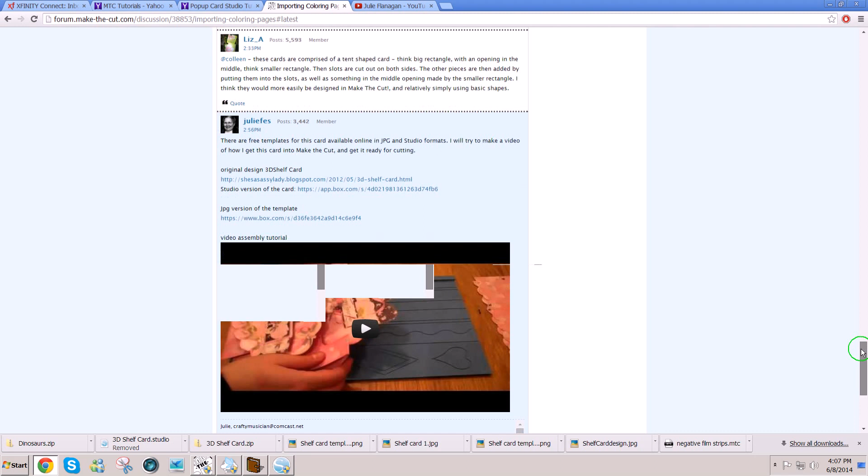And then I found a video assembly by someone else that you might like to see how the card is put together. If you search online on Pinterest for shelf card, you'll see all kinds of lovely projects made according to this design. So be sure to look to get some ideas on how to decorate the cards.

What I'm going to do is show you how to get this file from Silhouette Studio into Make the Cut and ready to cut in Make the Cut software, or if you prefer to export it as an SVG that's usable in other software. So we'll get started by opening up the Silhouette Studio.

I'll go to File and I'm going to open this studio file, and I'm using the Designer Edition version 2.0. You could use 1.9 if you wanted to. And I've already downloaded the shelf card. That was the JPEG folder. Here's the 3D shelf card.

So open it in Studio. There's a lot of pieces in it, but all I have to do is go to File, Save As, and change that Studio to SVG and click OK.

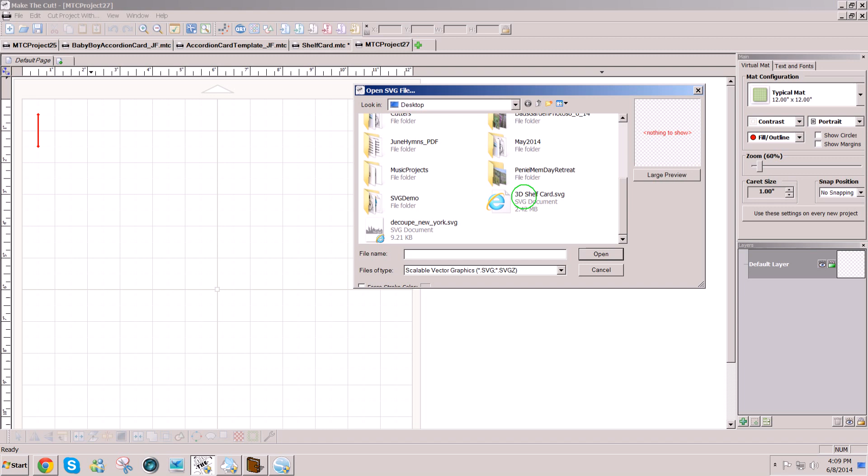Now I'm going to go into Make the Cut and we'll open a new project here, and I will go to the SVG icon at the top of the page to import the SVG and look for my 3D shelf SVG card and click on Open. And you'll see that all these pieces come in, including the instructions.

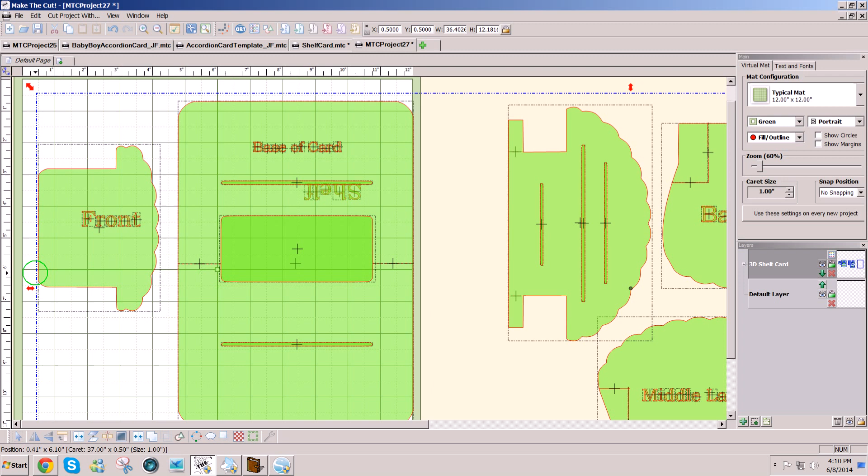Now I'm going to change my mat here to green so that you can see the various pieces on here. And nothing is grouped, so the first thing that I do when I get this project in here is click away from the selections to deselect. I'm going to take the text in each little area, click on the join at the bottom and send it to its own layer, because I'm not going to want to cut these words.

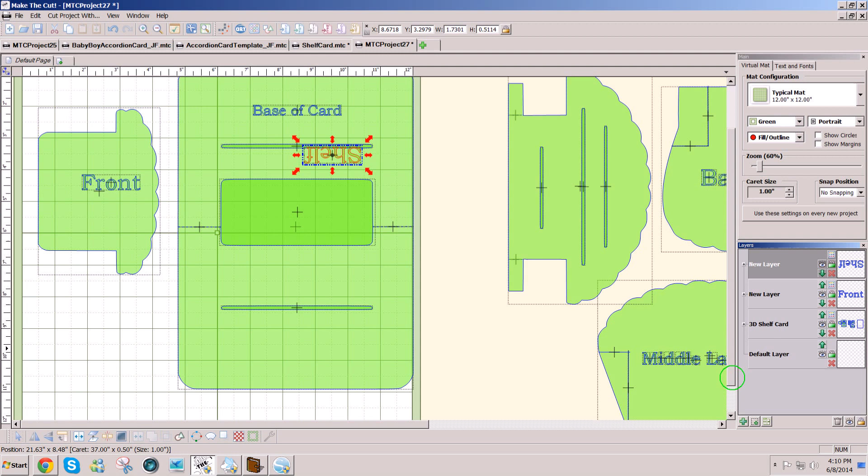So I join it together to make it easier to handle, and I just click on the smaller of the two green plus icons in the lower right hand corner so that I can put these words on other layers so that they can be hidden, so I don't want to cut them. So first I'm joining, and then sending to its own layer.

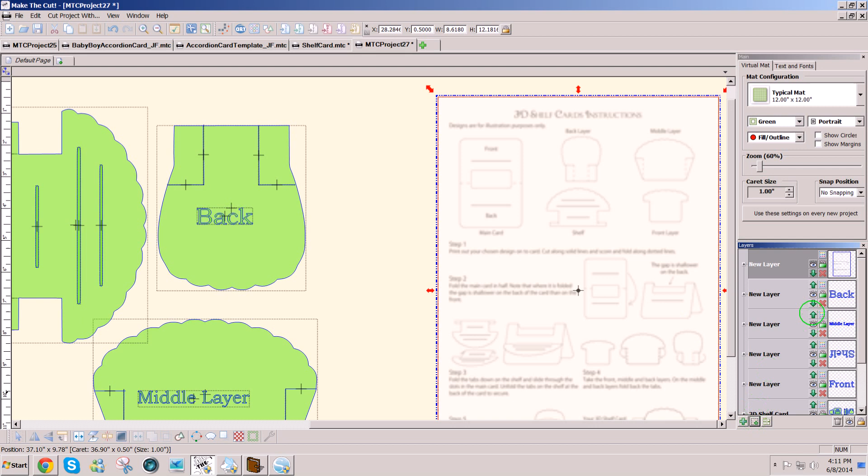I'd also like to send the instructions to its own layer, so I'm going to hide them for now. You don't need them right now. And now I have all of these different words here.

I'd like to put all the text on their own layer. So I'm going to click on this and hold Shift and click on each of the words on the right side of the screen here on the Layer Properties toolbar and click on the smaller, the green plus icons to send all of these to a single layer.

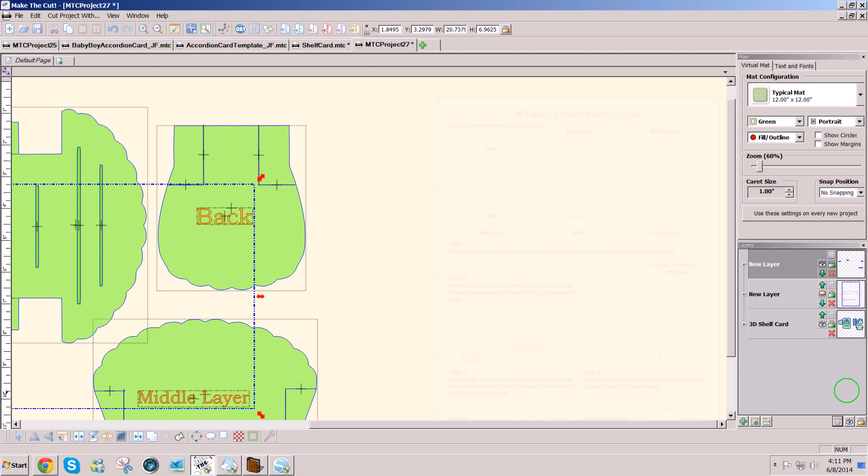Now I can click on the trash can to get rid of the empty layers, and I can hide all of the text that I've selected. The next thing, oh, I forgot one of the texts. I'll get that. Send it to its own layer.

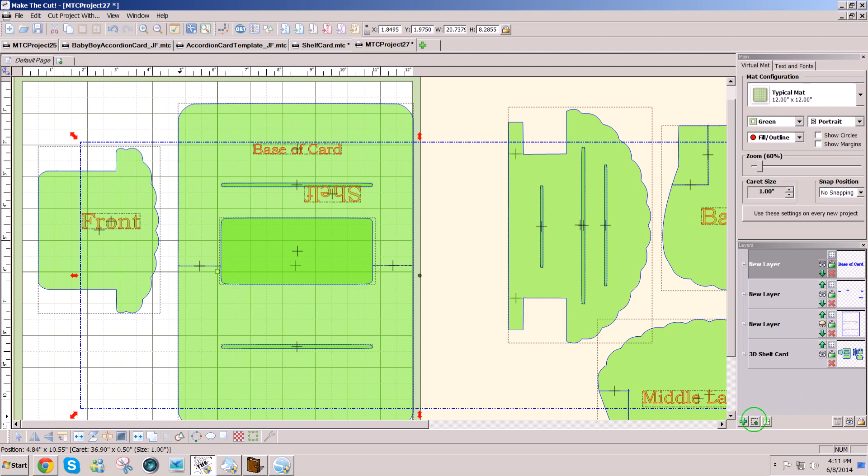Now I'm going to open the others and send them all to the same layer. Click on this layer, hold a shift, click on this layer, and click on the plus icon, so now they're all on the same layer, and I'll hide them.

So now I'm left with the design pieces. The next thing I like to do is put all the score lines on their own layer, because if you want to use a scoring tool, you're going to need to have the score lines on a separate layer. If you don't want to use a scoring tool and just want to use dashed lines, these might cut okay. Let's look at this in outline form.

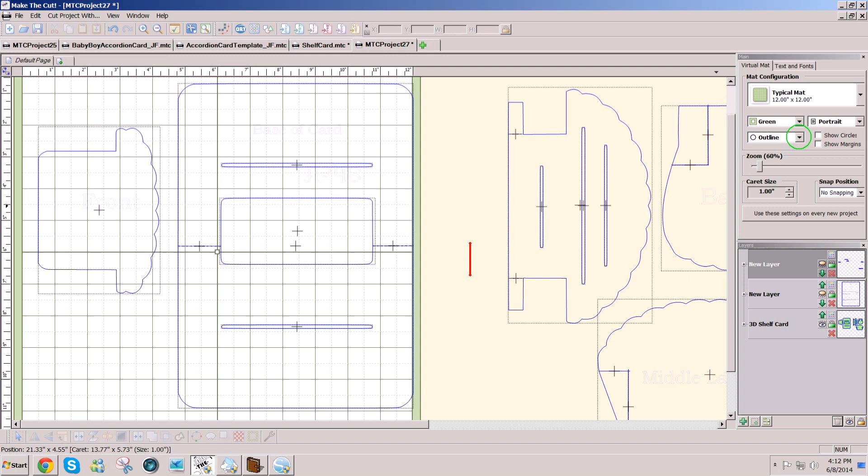Those score lines are very close, and I like to spread mine out a little bit more so that they don't tear. I generally don't use a scoring tool, I generally just cut them.

So I'm going to select these scoring lines, join them and send them to their own layer. Then I'm going to select these score lines, join them, send them to their own layer, and these score lines, join them, send them to their own layer, and these score lines, join them, and send them to their own layer.

Now I'm going to hide all of these score lines, and I'm going to leave them on separate layers for now because I want these score lines to stay with the actual designs. Did I get these? They don't look like I got these. Send them to their own layer and hide. There we go.

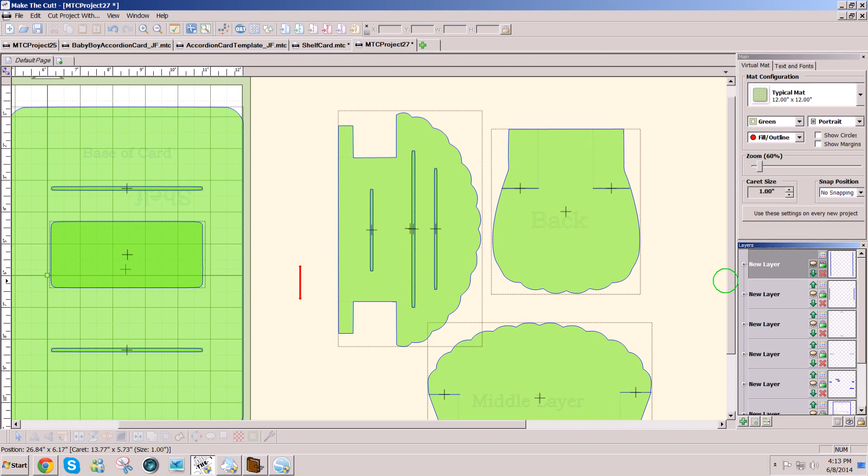Now all of the pieces that I have left, I would still like to join them together. Once you select all of these pieces and click on join, you see the way it's going to look when it's cut out with the slots. And then I'll select all of these and join.

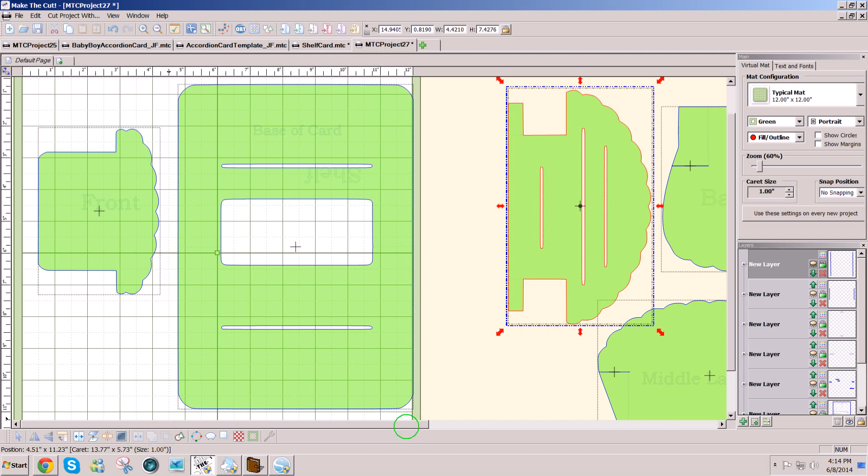And I'll select these to keep the cut lines with the piece, because I will be moving these around on my screen in order to cut, and I would like the lines to stay all together.

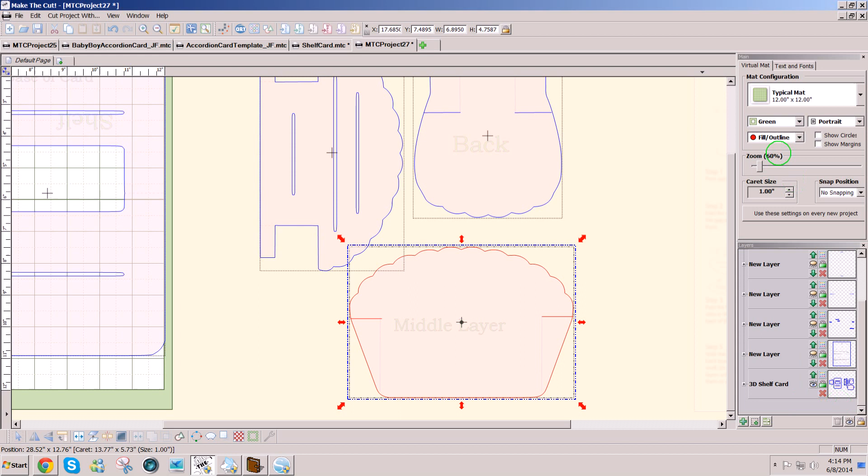So the other thing I might want to do is change the color of these. I'll change these to pink so that I can view this with contrast, see them a little more clearly. And when I cut these, since they don't all fit on one cutting mat, I'm going to right click on 3D shelf card and select each its own.

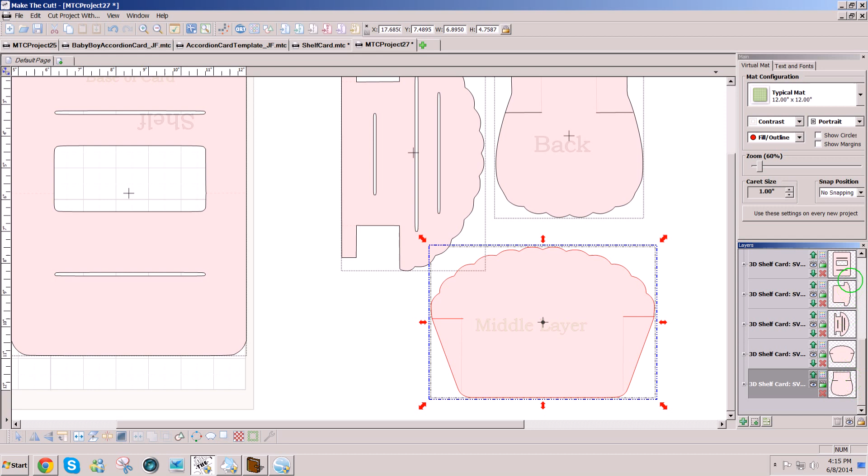This way each of the design pieces goes to its own layer, and I can choose the pieces that I want to cut. Or if you prefer, another thing I could do, which I think I will, is select the shapes that are going to go on one page, and I'm going to send them to one layer and click on the trash can to get rid of the empty layers.

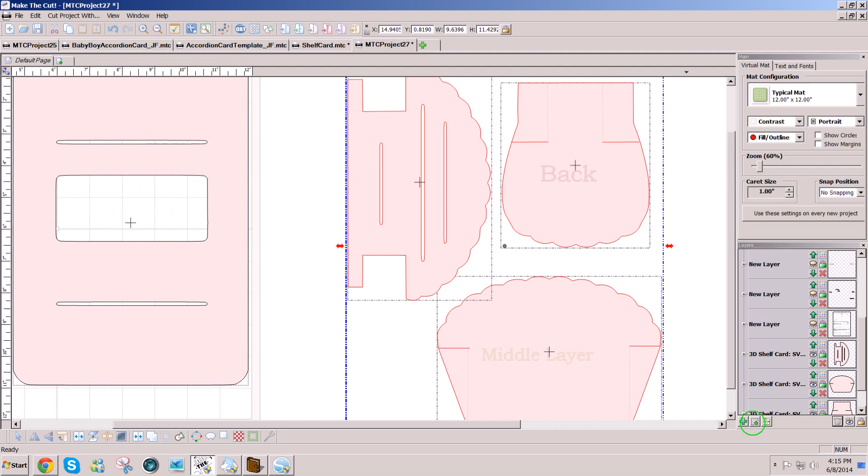Then those pieces that will fit on another page, I can select all those and send them to their own layer.

Now if you were going to cut these all out of different colors, that's where you would want to decide if you want them on separate layers or not. It's all up to you and how you decide it. And you can determine what you want in terms of designs for these.

A lot of the ones that you see online are being sold as print and cut with all kinds of artistic designs printed on these different pieces, and it would be up to you to decide how you want to decorate your card.

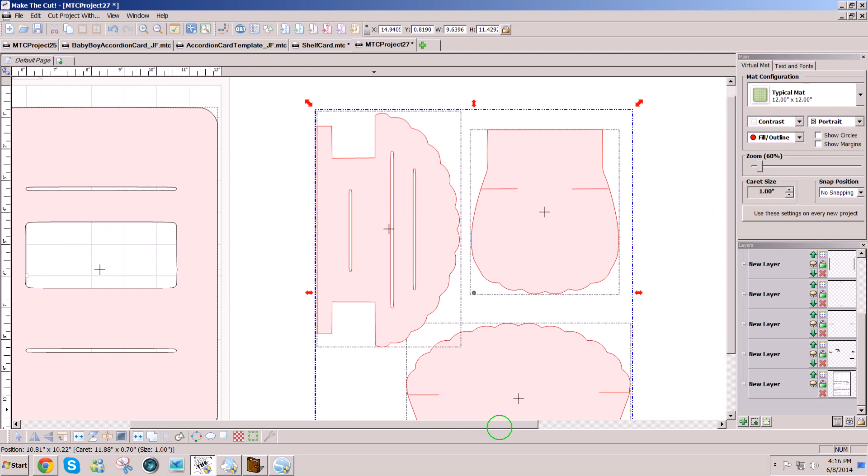But right now I have all the pieces all on one page. I'm going to show everything with the toggle, this eye in the lower right corner, show all, and I'll zoom out a little to show you that we have everything here.

Now if you wanted to, you could send each layer to its own page, but before I do that, I would like to save all of this as SVG.

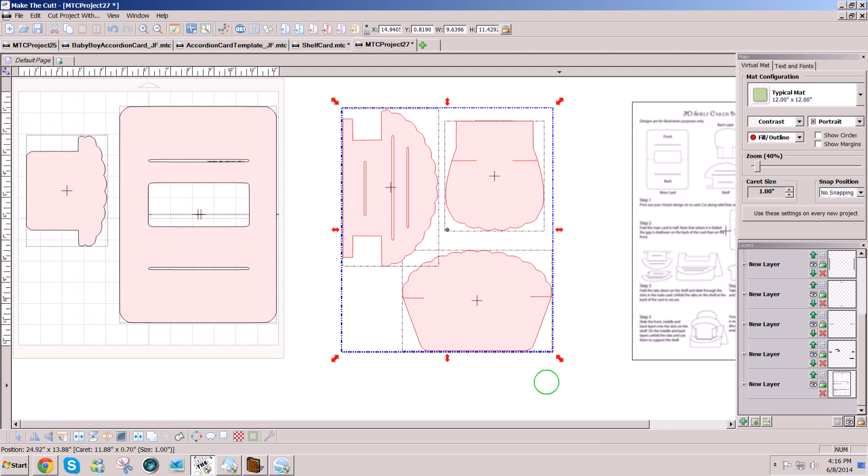I see a little score line there. I wonder what that is. I'll send that to its own layer. Oh, it's not a score line, it's a word. Okay.

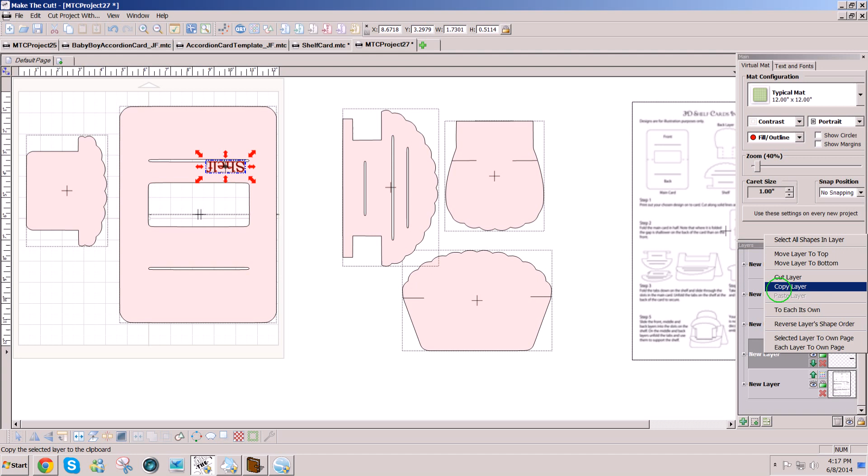So I'm fine on that. And I thought I was showing all the layers. Oh, all of the words are way down here on the bottom, so if you want to see the text, which I probably do when I export this, I'm going to move this layer to the top. Now I can see all of the text.

If I want to see these instructions really clearly, I found the quickest way to do that is to move it over here and go to File and Print Preview.

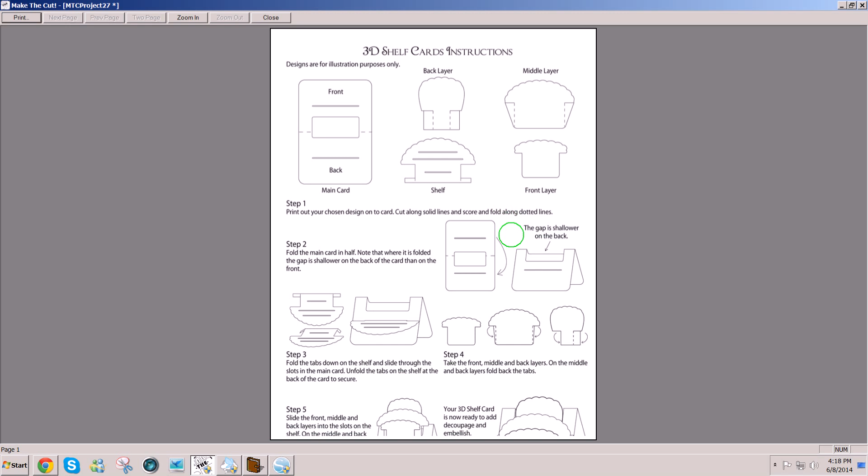But I'll have to move it to the top, so right click on the layer, move layer to top. Now I can go to File, Print Preview, and I can read these instructions anytime I need it, which would probably help me if I put this on a separate page so that I could just go to that page for instructions. But for right now, I want to leave it all here.

I want to select all using the lower left arrow icon and go to File, Export, Selection to SVG.

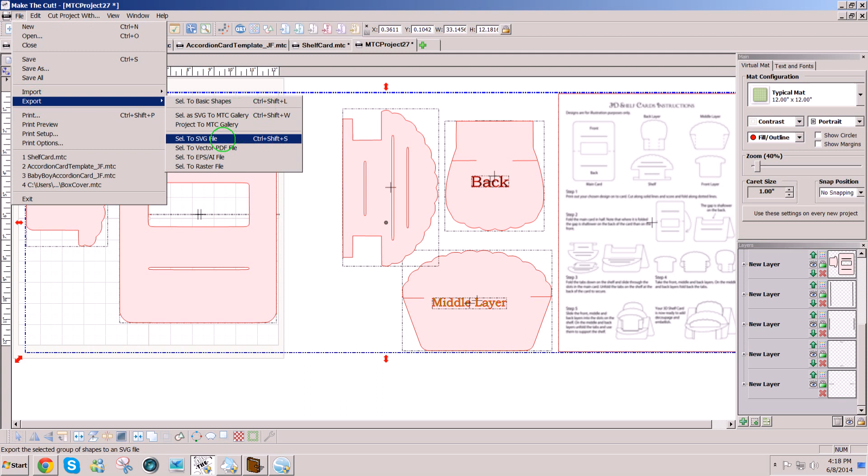I'm going to do one more thing here. All these score lines need to go to the top, I think, for them to be more visible. So I'm selecting them all, and I can join them. I think I will join them so that they're all one piece. And I'm going to move this layer to the top by right-clicking and selecting Move Layer to Top. Now I can see all those score lines.

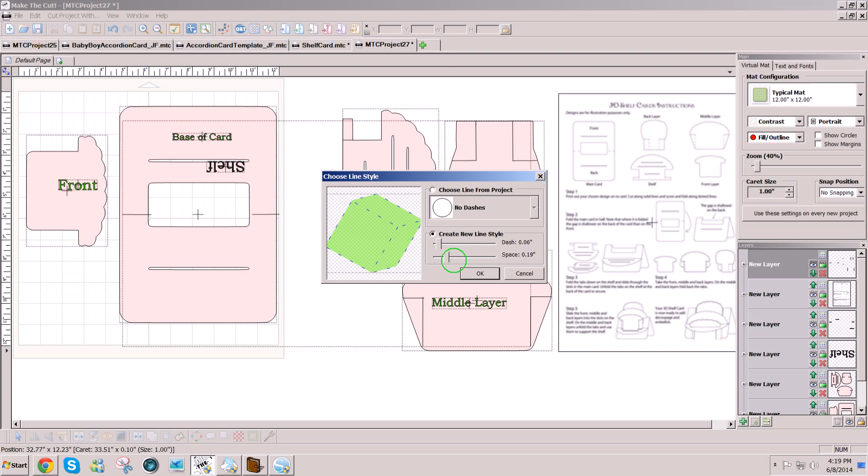I'll get rid of the empty ones. These are just things that I do when I'm preparing to cut or export. The other thing that I didn't do yet was change all these score lines. By clicking on the color box icon, I can click on Line Style, and I'm going to move these score lines, give them more space between them, and that's how I prefer to do my score lines.

And I'm going to put this text all on one layer. And one more thing I do is label the layers. This is Do Not Cut Text. Remind myself I'm not cutting this, and I remind myself that this is score lines. So what I'm doing is just clicking on the layer twice, double clicking the layer name, and typing in instructions, so that I know what each layer is.

I'm not going to give these layers names, but if you wanted to, you could name them middle, back, front, as you prefer. Now I think I'm ready to select all and export as SVG.

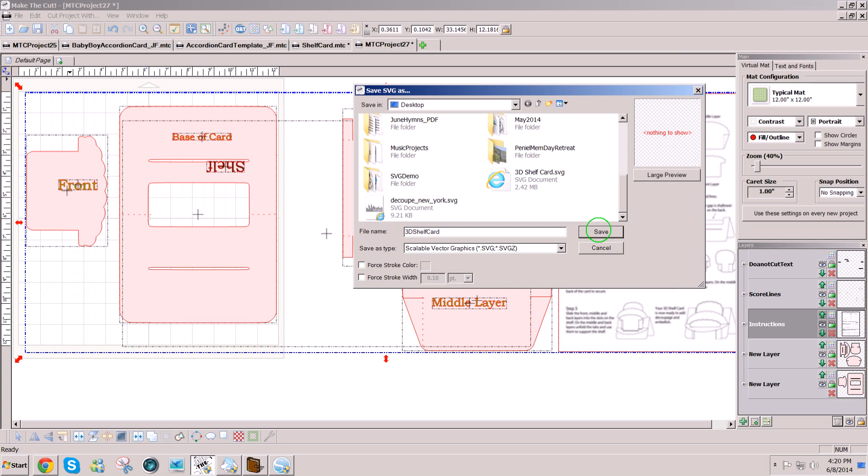So I go to File, Export, Selection to SVG file, and I'm going to name it 3D Shelf Card. A little different than the original SVG file, just so I know that it's my editing and it's ready for me to use in my other software. So I click on Save. So it's been exported now as SVG.

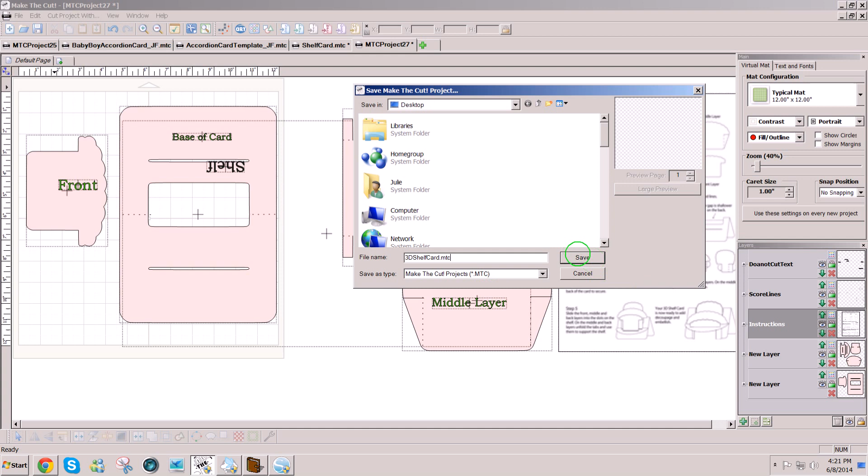I'm going to also save as 3D Shelf Card dot MTC. I'm going to save it in MTC format. So to make it easier for me to cut,

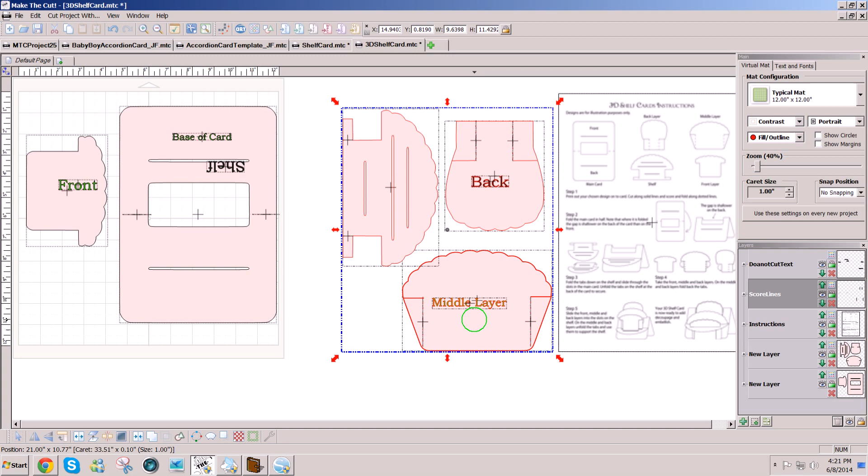I've joined all of these score lines together. I think it might be good to not have them all together. So I can use this split, and the reason I'm going to split them is I want to take this group of shapes to the next page. To do that, I'm going to go to Edit, Cut,

and I'm going to open a new page, and I'm going to go to Edit, Paste in Place, and just move it all over here. Now again, I'll click on the layers themselves to select them, send them to their own layer, which leaves the text and the score lines.

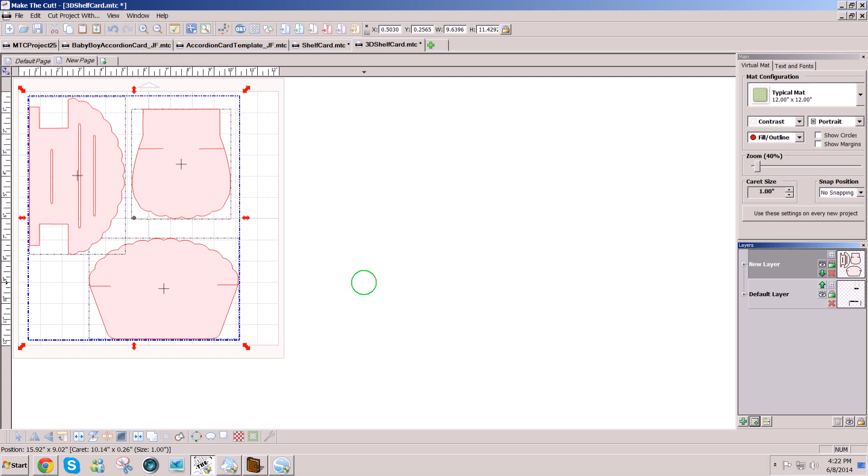So I'm going to hide this so we can see. So I'm going to take the text, put it on its own layer. Now I have the score lines, and I'll move them to the top. So I'll hide the words, and now this is ready to cut as a single page.

The other thing that I'll do is I'll take these instructions and cut, or Control X cuts, and click on a new page here. I'll type in instructions, add, and Control Shift V paste it back here. So now when I need instructions, I just go to File, Print Preview, and there they are without any shapes getting in the way. I'll also want to move my instructions forward.

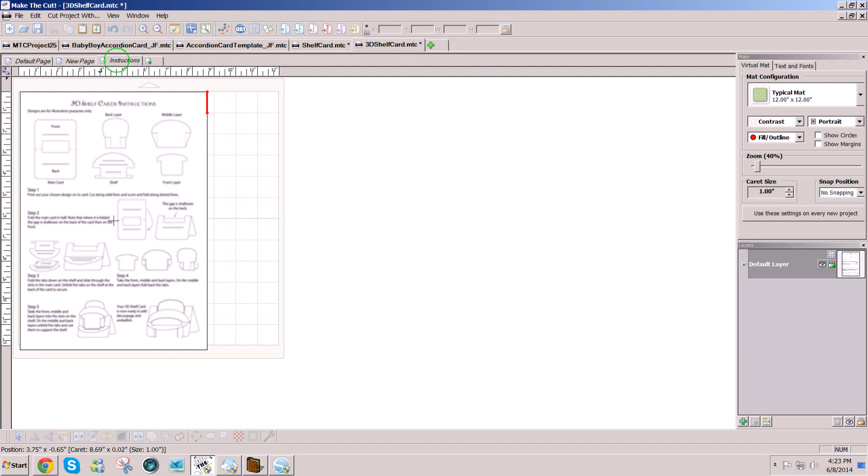That moves the tab to the right. So now I have this page here, and I want to make sure that I join my score lines again and hide my text, and now I have my designs on several pages, and I can decide on colors when I've got the theme of my card ready to go. So I'll go File and Save.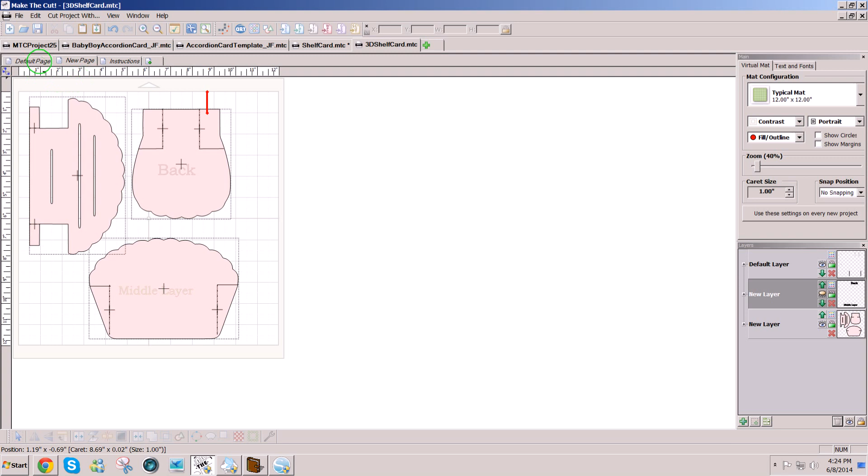I like to keep it all on one page until I export as SVG, because I can import that SVG into other software all as a unit. But now for me to use it on my Zing or my Pazzles or Gazelle or Cameo, I can do that all from this software.

And so I organize it the way I like it. You can organize it the way you like. So that's really all there is to it if you're doing the SVG file from Studio. It's Silhouette Studio Designer Edition versions 2.0 or 1.9.

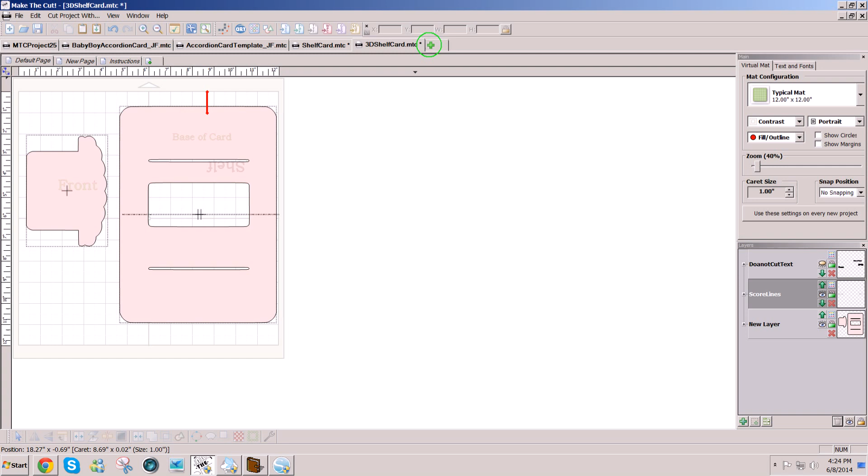So if you don't have Silhouette Studio and you need to get the files in, there's another way to get it in. You click on a new page here. If you downloaded the JPEG version, you would click on the pixel trace icon to get it in. And you see that there's 4 pages, one of them being the instruction page. So what you do is double click on the file you want, and you can bring it in.

It will probably be fine, but just to make sure, I'm going to take the threshold up to about 160 and apply the changes, just to make sure all the lines are connected.

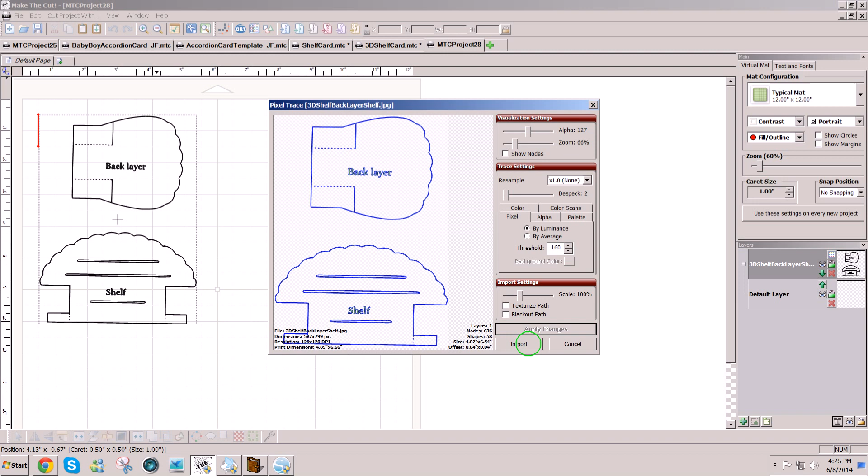When we bring in line art to Make The Cut, you get double lines. So in order to get rid of the double lines, we will be working with this. And another problem here is that these shapes don't come in the right size from the JPEG files, so we will have to do some resizing.

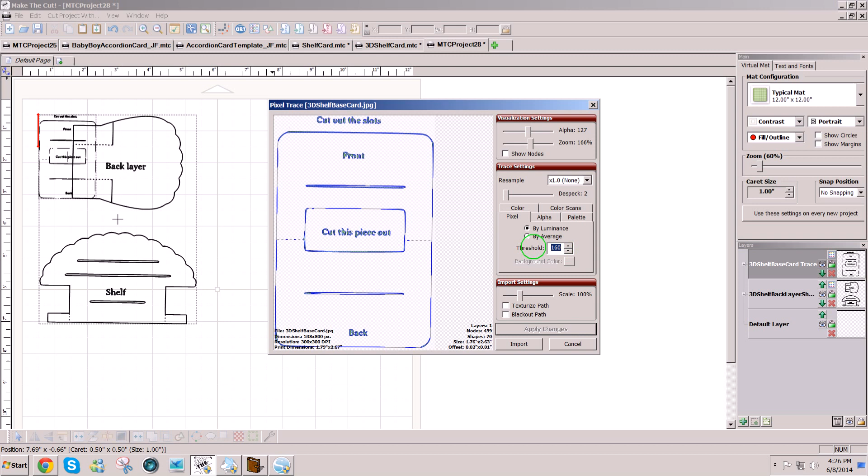So let's bring them all in first. I'll go again to Pixel Trace, and here's the second page. And again, I'm going to take this up to about 160, apply changes. Now it's going to have to be higher on this one because those lines are not coming in solid.

This method of getting the files in is not near as clean and precise in terms of size and straight lines, but it works if you don't have the designer edition.

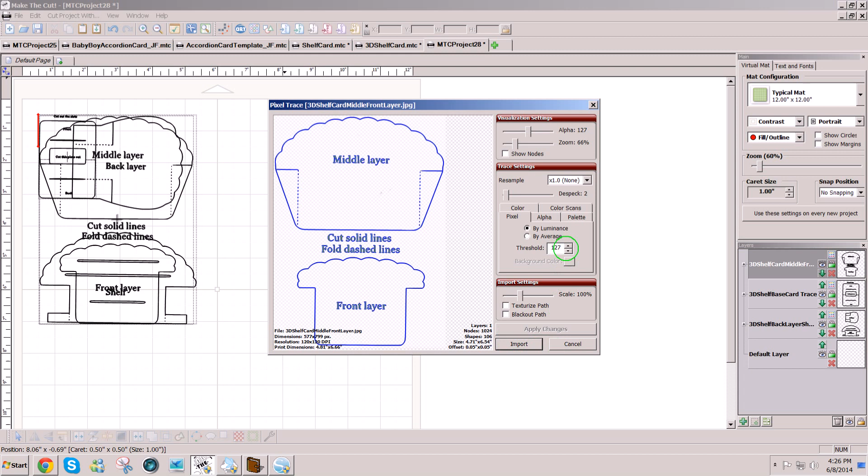I'm going to click on the third file, and I'll take this up a little bit to 160, apply changes, and import.

So I have several different files. You see how small this one came in as opposed to these, and they're not proportional, so I'm going to need to readjust according to specific measurements.

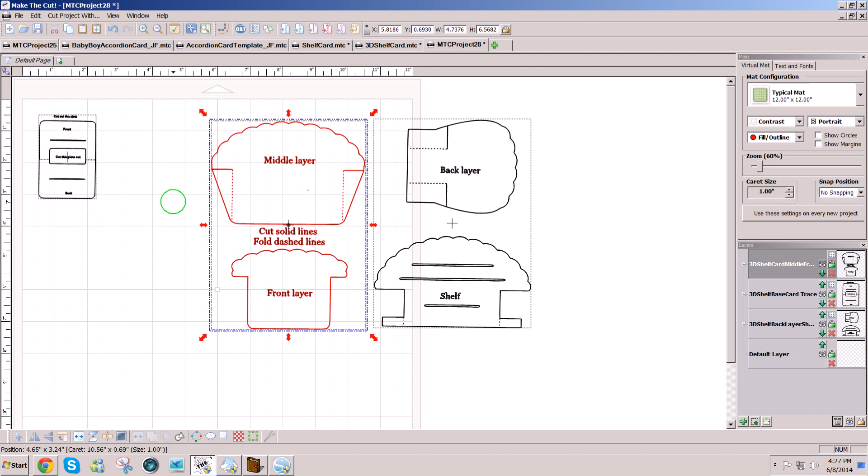But before I adjust the size, I need to do some changes on the file, getting rid of the double lines and getting the text out of the way.

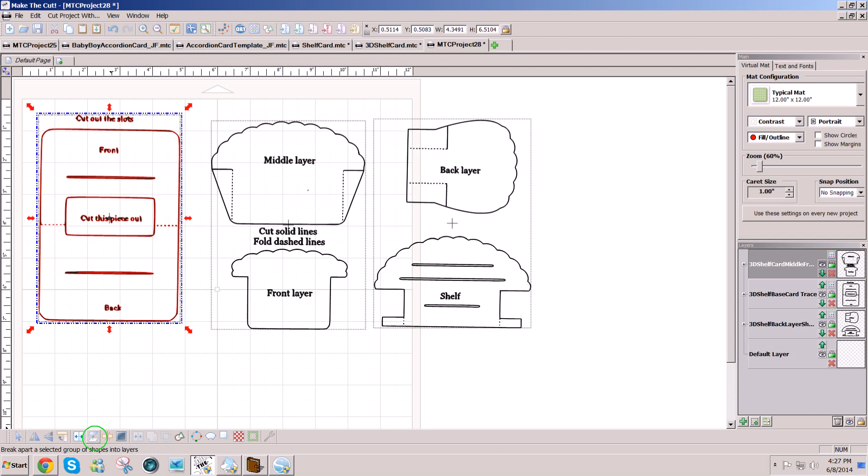So first thing I'm going to do is select the shape and then click on layer, and then I'm going to click on the center of the piece and move it to the top, and I'll go to the green screen so we can see what we're doing.

I removed the outside extra double line, but you see in here there's double lines and the text that we don't need. So to get rid of that, I'm going to click on this to select it and then select break.

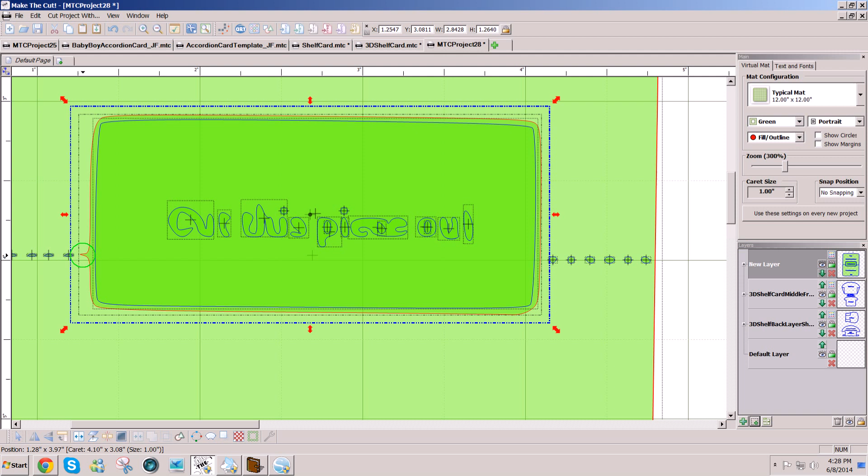And I'm going to click on the center. Maybe I'm going to get rid of the outside layer because it's a little more distorted than the inside. I like to keep the lines that are the best if I have a choice between one line or the other. So I get rid of that, and then I'm going to just delete the text.

It's not very legible anyway. And then these score lines, you'll notice, are round instead of being lines, and I really would rather have lines there.

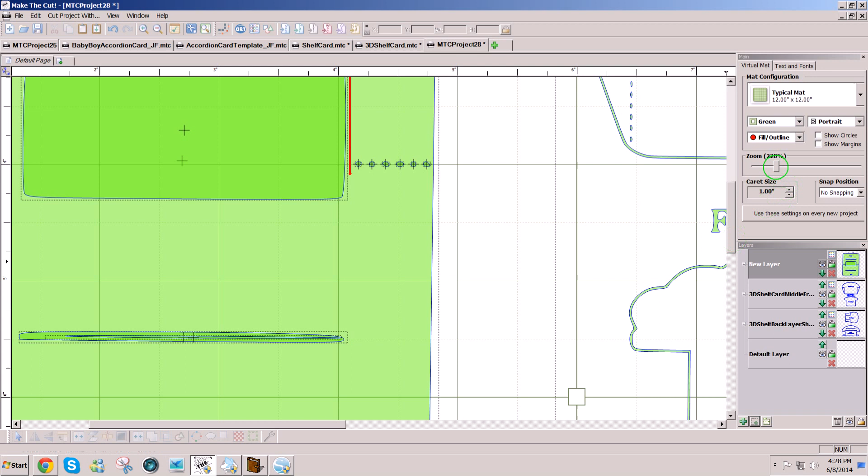First I'm going to get rid of the center piece of this double line and get rid of this text, just hitting the delete key after I select it.

Now I'm going to select these score lines, and I'm going to go to the wrench tool at the bottom and click on thin paths, and this created... I'm going to undo that again so I can make sure that I select all of it.

When you use thin paths, it creates lines in place of those circles most of the time. It didn't do that here. Not sure why.

Another thing I can do, if I like these lines, I'll join them. Make sure they look the way I want, and I'm going to join these.

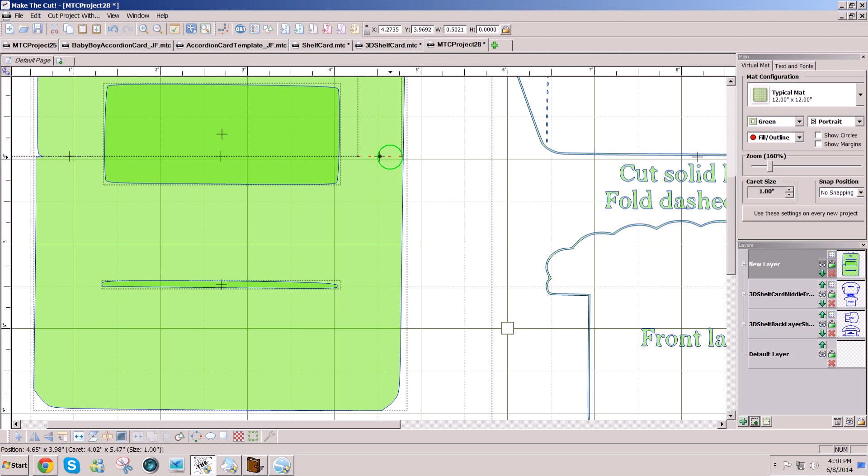And see, these are holes and they're kind of ugly. So what I'm going to do is delete those, and I'm going to select these, hold Control and Shift, and drag off a copy and move them over to the right, making sure that these lines are lining right up with the original. You can see the X, the plus on the left side, and my dotted lines showing the location, and I'm going to release everything here. So now I have some better lines here.

This one also has a center double line. I'm just going to select it and delete it, and select these and delete them. Now the trace on this shape is not ideal.

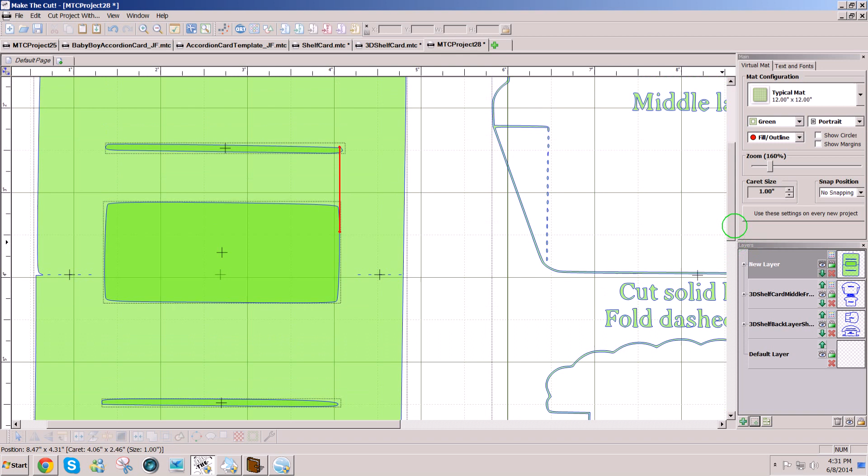That'll work. You can, if you wanted, just replace that. I'd probably even replace these with better perfect shapes, but to do that I'll create a new layer.

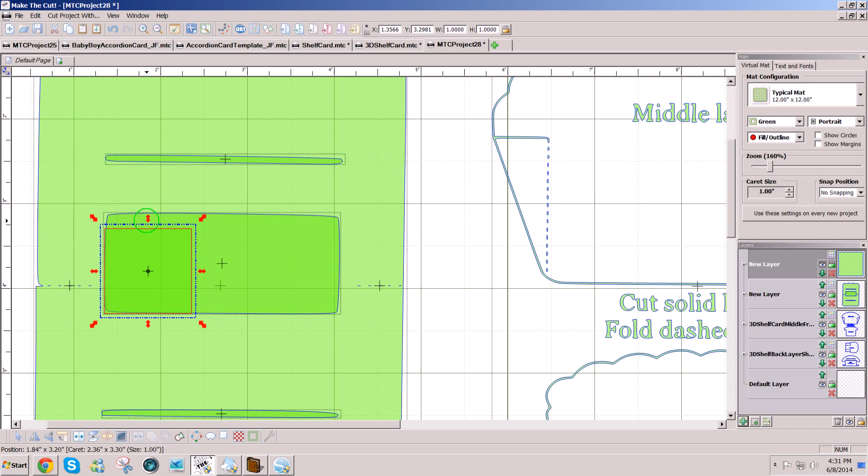It's highlighted in gray, and go up here to the shapes, basic shapes, and double click on the square and just resize it to the size that I would like this window to be, to get a nice clean square. If you'd rather use a rounded rectangle, you could.

And then I'm going to hold Control Shift and drag it up to here and just resize it here, and then Control Shift and drag a copy down here.

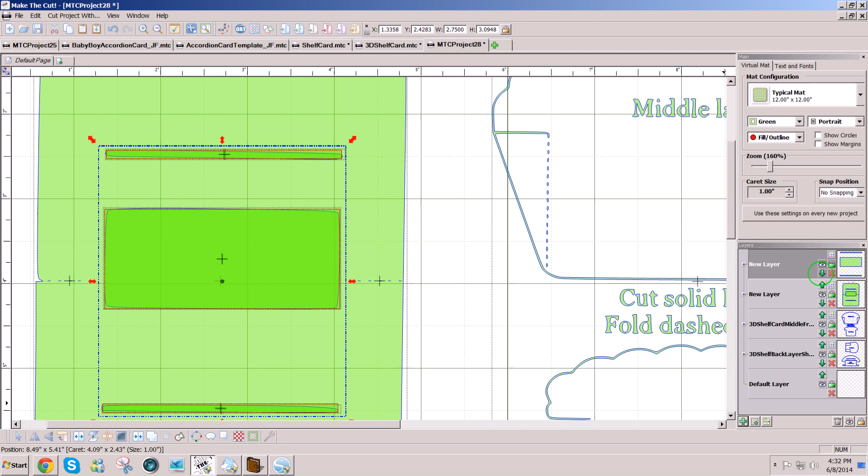And I'm going to go ahead and select these new ones. They're already selected. I'm just going to hide those and delete the ones that are here. Now I can show these, and I have some better lines there.

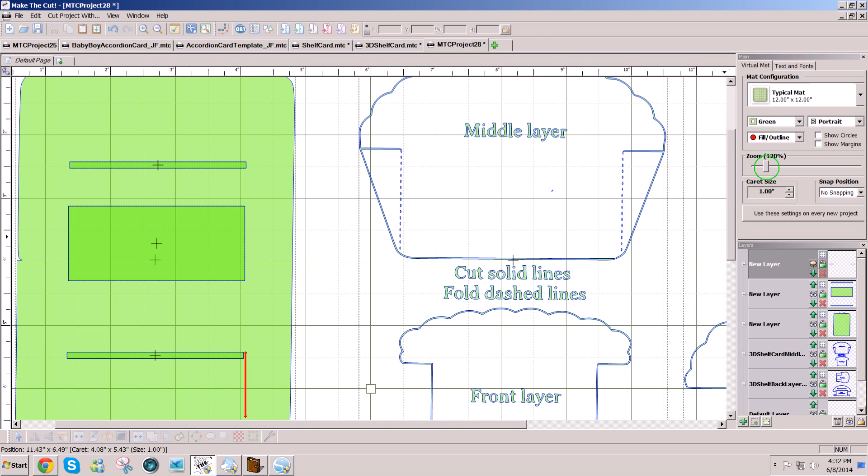I'm going to take these score lines and send them to the top and hide them, because now I want to grab this whole piece right here and use join.

If I were going to use this file, I'd probably clean up that corner. In fact, I might just replace this whole thing because it's crooked and kind of ugly.

So to do that, I'll just use break, and I will hold Control and Shift and drag me a copy of this rectangle and just resize it so that it's up here.

If I do have a rounded rectangle available in my basic shapes, I'll send that to the top, hide it, delete this one, and then have this one available. So if I don't want these square corners, I could get the rounded rectangle. For time's sake, I'll just use what I have here.

So now I have this piece and the score lines ready to go. The only thing that I haven't done to this piece that I would need to do is resize it.

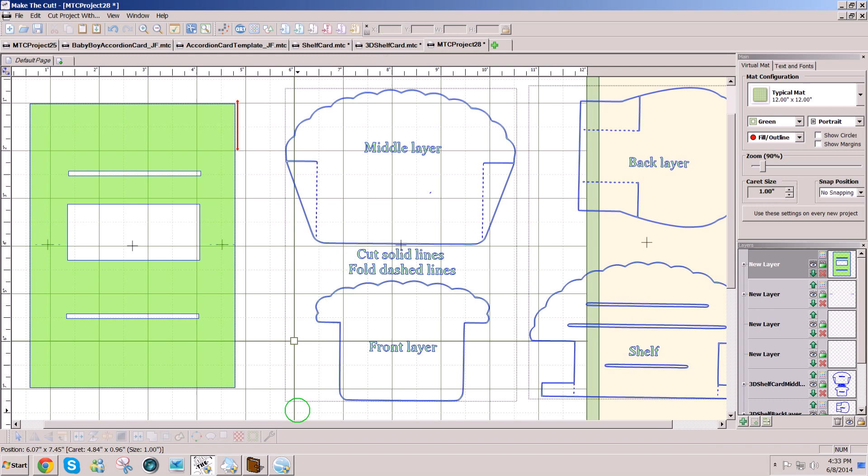So I'm going to go back to, you can either go back to Silhouette Studio and see what the size is there. You can select it, and they have two pieces there. You can right click and ungroup and then select that piece.

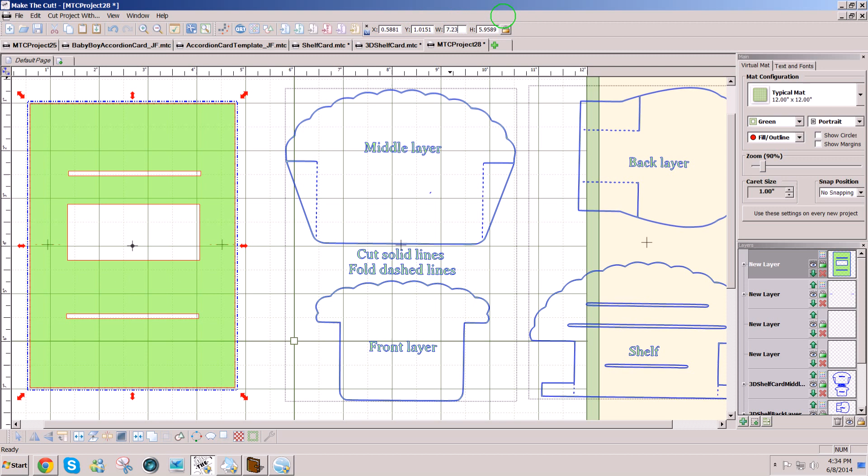And you see that it's 7.230 inches. So if I select this, I want it to be 7.230. On the width, 7.23, and enter with the gold lock icon on to resize.

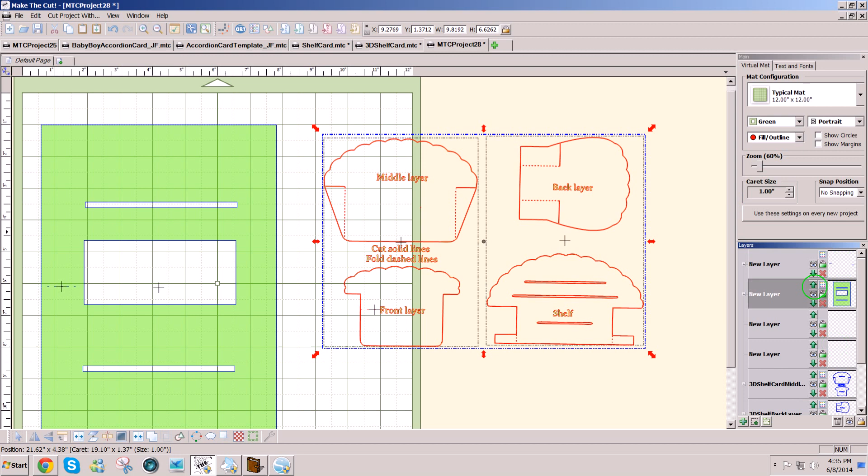And that resized the score lines as well. So I'm going to zoom back out, and before I start working on these pieces, I'll move them over. So move the score lines up and get rid of the empty layers, and now I'm ready to do pretty much the same thing on these.

Each one of these shapes has double lines on it. They're all selected, and I think I'll layer them all at once. Click on Layer, Control plus L, and then click on the top to send the top pieces to the top layer.

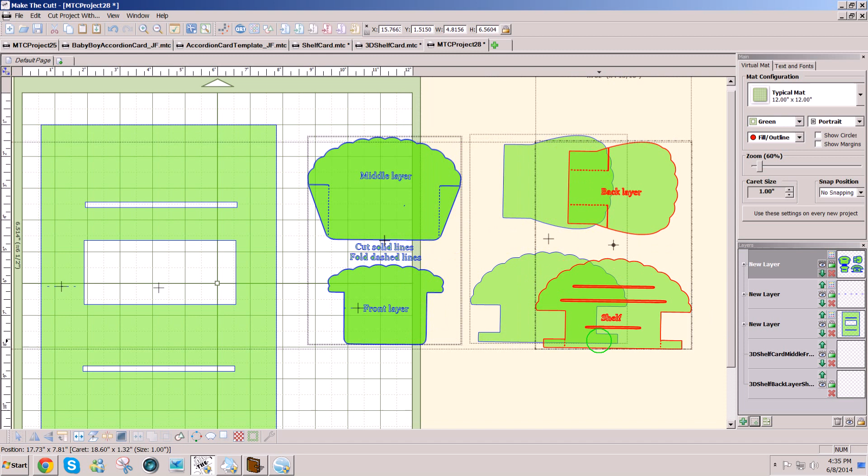I'm going to get rid of these bottom pieces here. And I have a score line there. Oh, that's a score line. That belongs here.

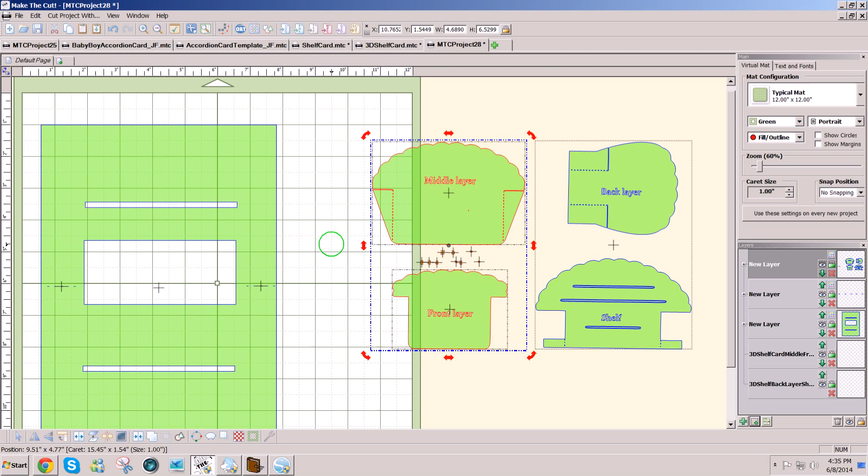Now to get rid of these extra little spaces here, I'm just going to split and delete these. Now I've gotten rid of the double lines on the outside, so this one's fine, and this one is fine on the outside.

But we have some inside double lines and we have text that needs to be removed. So in order to get rid of anything in the middle, I need to use a break.

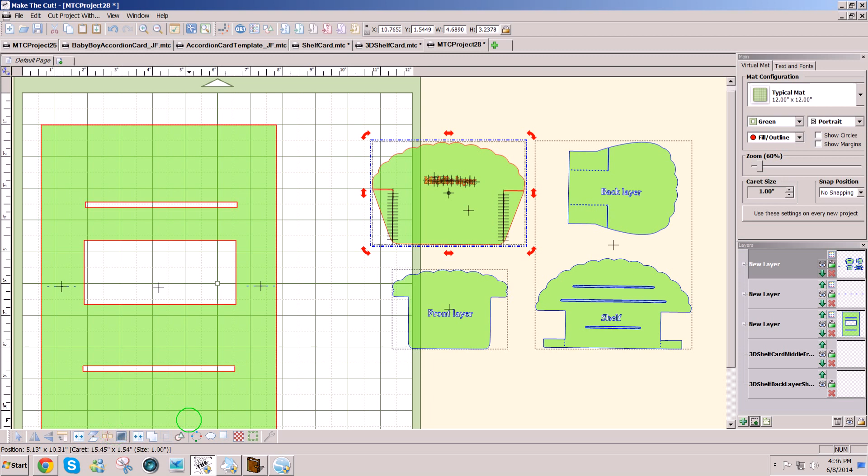So to do that, I click break, select the text and delete it, and click on break, select the text and delete it, click on break, select the text and delete it.

Now I have a center line in here. I'm going to delete that. Delete that one. I could zoom in real close to see those. And I want to check these.

Score lines are probably going to need to be made into thin paths. If we group them, we can see them better. So I'll join them, click with the join.

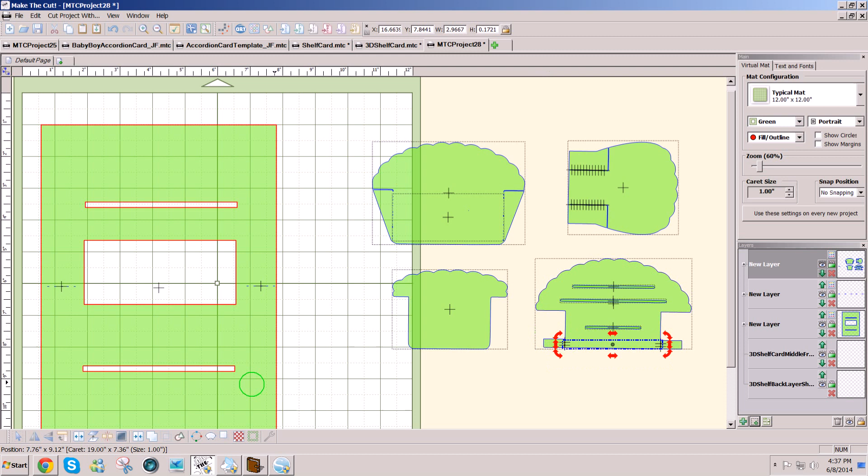And we have a couple score lines here. We'll join those, and again, thin paths. Select these. I'll join them, and thin paths.

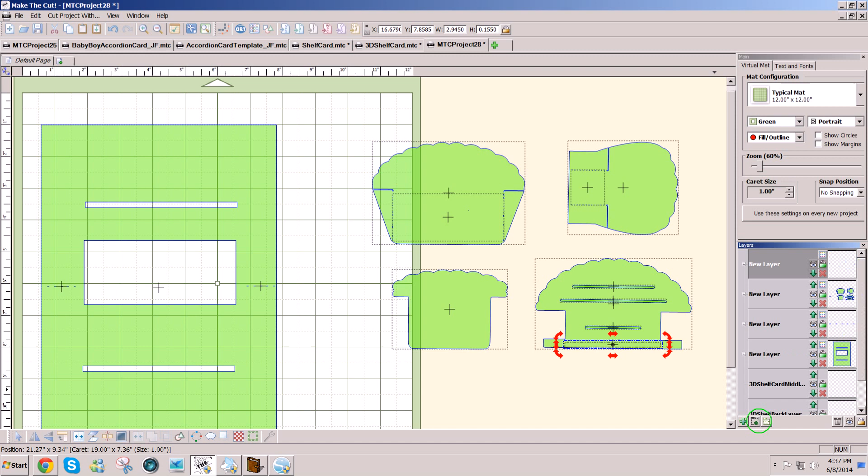So now, probably I'll send these score lines to their own layers so that they're out of the way, and hide them.

Now this one is ready to join, and that one's not needing anything. Let's look at this one.

I'll type 4 and 3 to zoom in really close. Well, there's no double line, just a little slit there. It picked up part of one of the dashes. I can get rid of that little thing by clicking on the figure 8 up here, clicking on the eraser tool, and holding the control key. I can do an inverse erase.

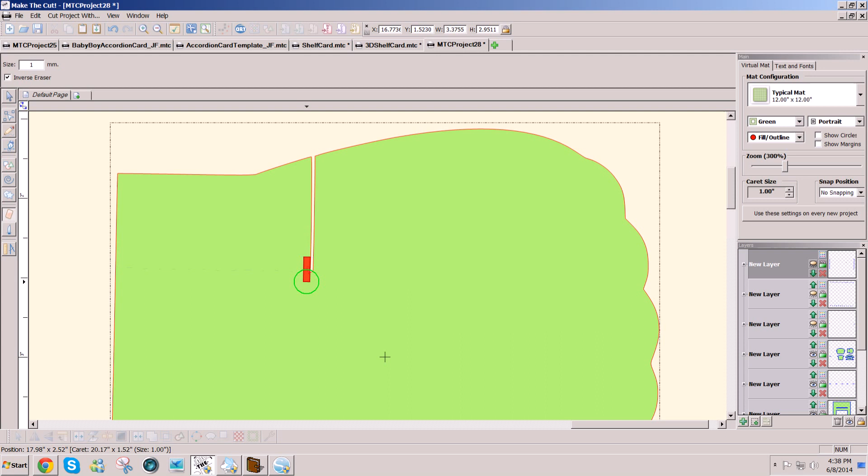So I'm going to Control Z, undo that. Well, I can do it again. I'll hold down Control and just drag over it. And that gets rid of the extra little jaggy there. And I don't see any double lines, so I think we're fine on that one.

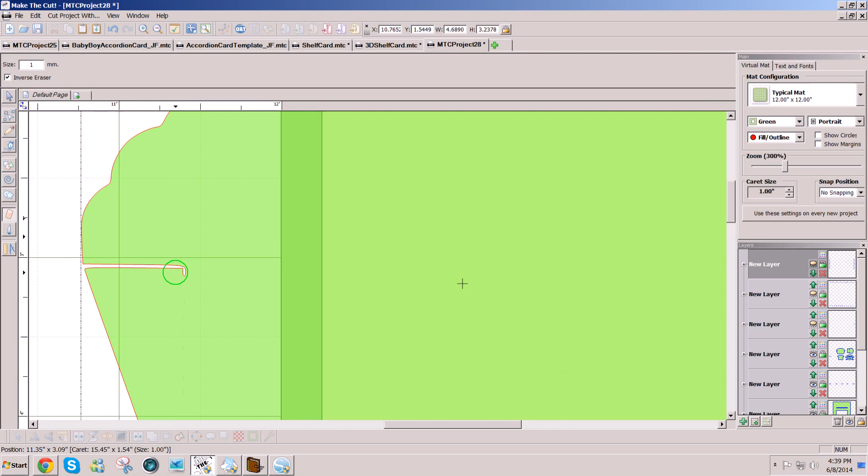So I'll zoom back where we were, and this one has probably the same issue. Type 4 and 3, get in there real close, and sure enough, click the eraser, hold the Control, and drag. As you can see, cleaning up these designs takes some major time, so you can see why it's worth it to me to have the designer edition and save as SVG with the 2.0 or 1.9.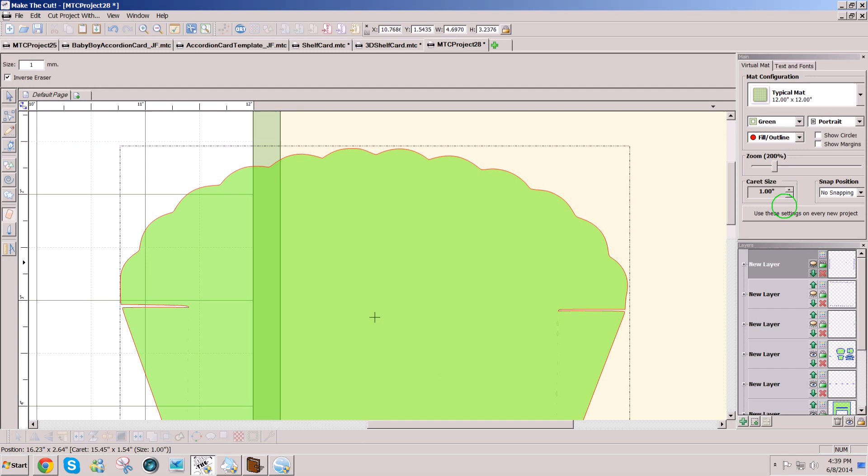Much easier. But if you only have a few designs to do and you don't mind taking the time, you can get this all done. Okay, so I think we're ready to show all. Now all we have to do is check the sizing.

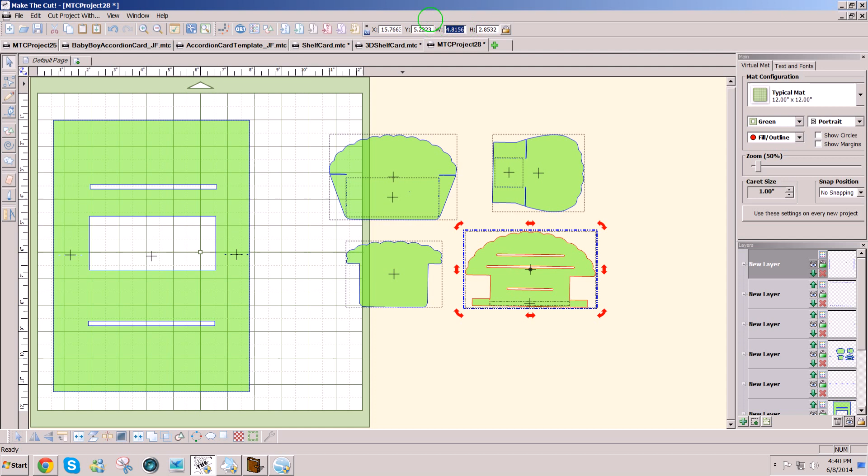Now these pieces all have, here's the shelf. This I didn't break yet, so I'm going to ungroup it, right click and ungroup, and select just this size and see, it's 7.365 tall, 7.365, and this would be on the width. 7.365, enter. So that one's the right size.

And the back, 4.515 across, 4.515, enter. I'll just move that up.

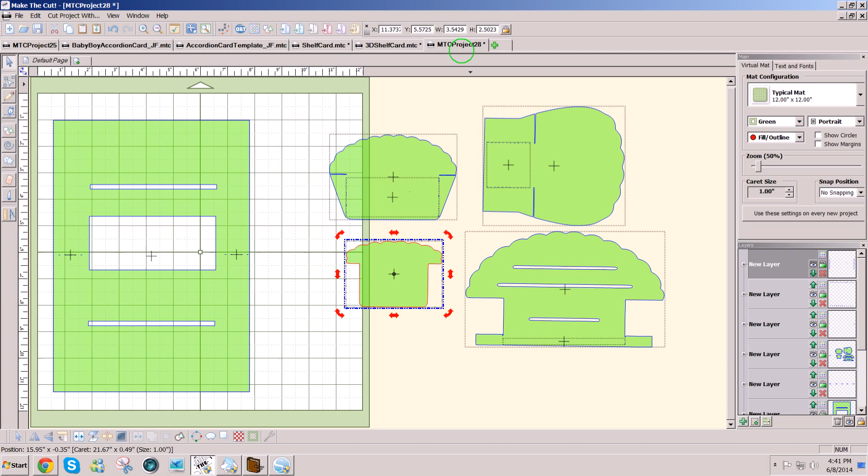And then this one that looks like a cupcake, this one here, is 3.7. Was that 3.7 bottom to top?

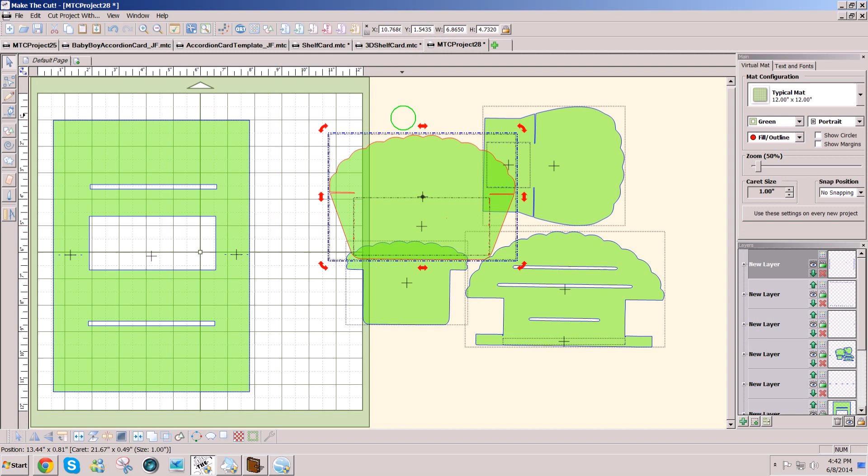And then the one that looks like a cupcake, and that's 6.865. Width, I think. Let me check it. Yeah, width. Okay, so I've essentially got the same thing.

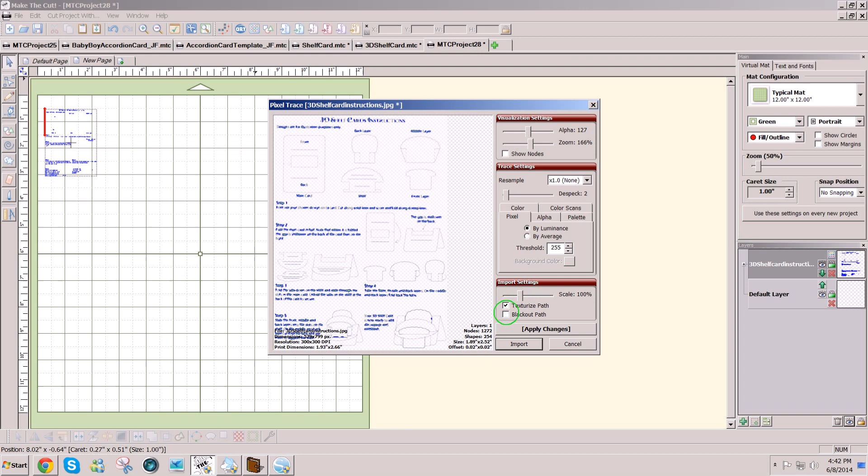I can also import the instructions if I want. I can click on the new page, add, then go over here to pixel trace, click on the instructions, and this time I want to view the whole thing at full resolution. I'm going to go 255 on the threshold, texturize, blackout path, apply changes, and import finish tracing. Then I can just resize it real big. Might want to use the contrast mat to see it better, or even better yet, go to File, Print Preview to view the instructions when I need it, and close.

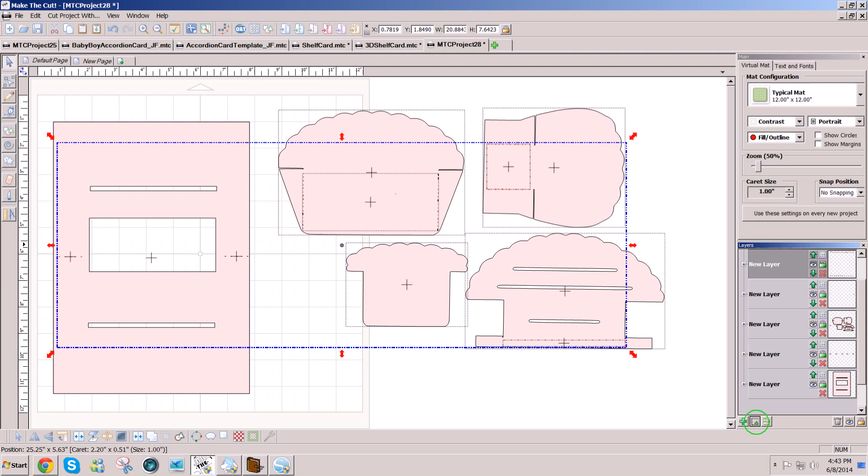So again, I can save these. Maybe I'm going to make these pink. Get rid of my extra layers. And I can save this whole thing. I'm going to want to hold the Shift key and put all of my score lines on a single layer. I like to have them at the top, then I can see them. Move layer to top.

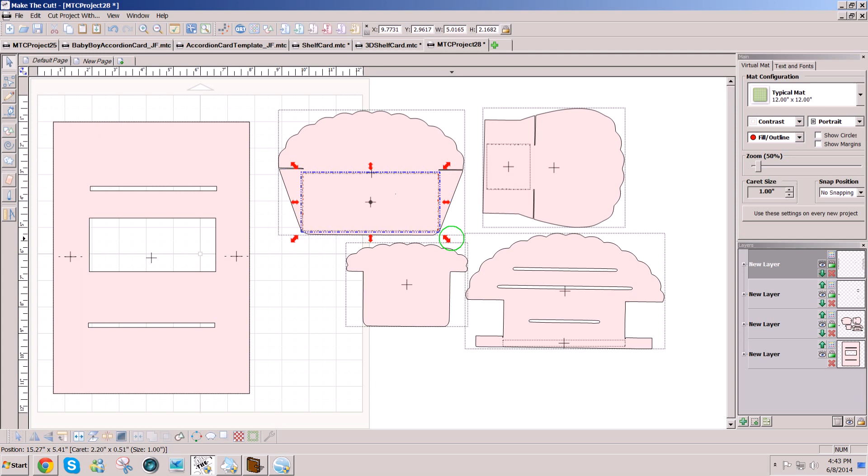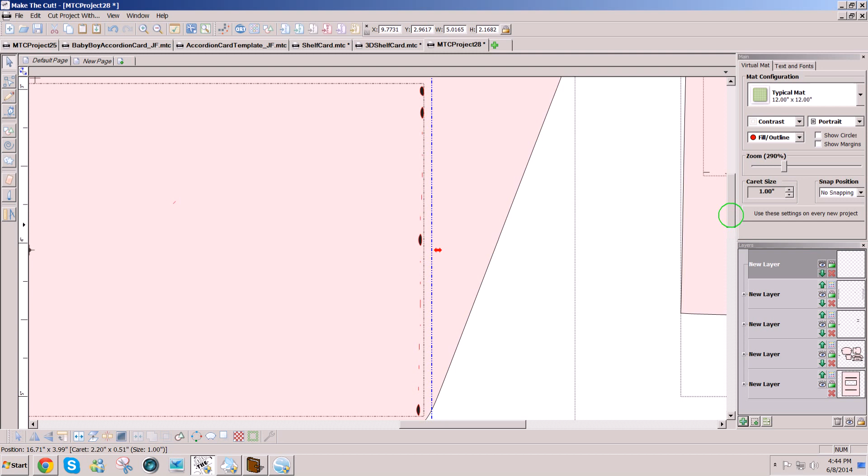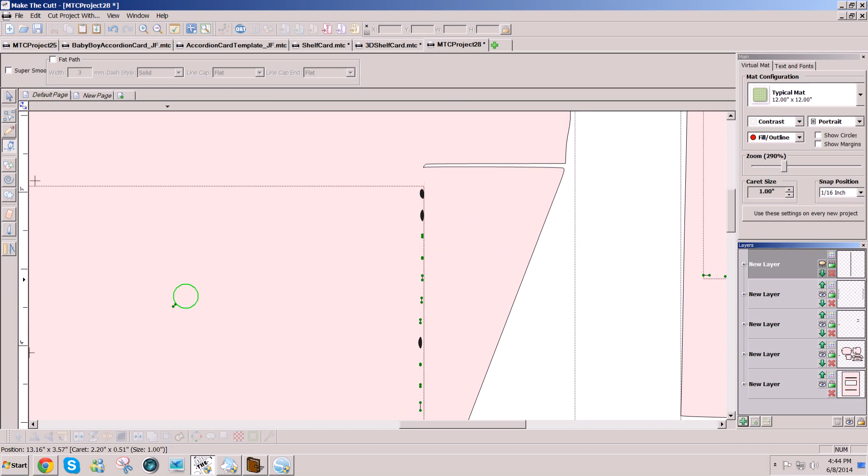Sometimes it's easier to just draw a design than it is to trace it, but I just click on the Bezier draw tool and maybe put snapping on of 1/16 of an inch. Left click at the top of the line and then right click at the bottom. Then I have a new line. Now I can hide that line, and probably want to come over here and do the other one too.

It's not too neat either. You hide, make sure I'm on this layer. Click on the draw tool and I'm going to follow these guidelines here. Left click and right click.

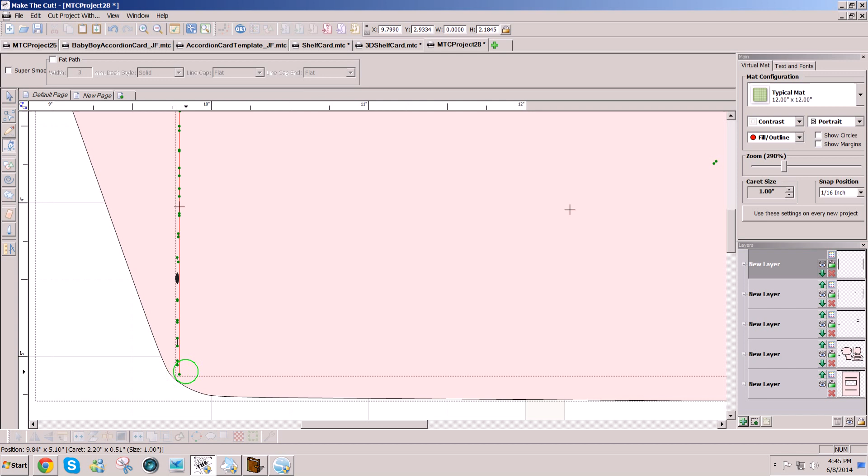And I'll hide these lines so that I'll go back to my top arrow, click this to select it. I'll have to zoom out a little bit. Delete that, show these lines, and go to the color tool, click on line style and create my dashed lines there.

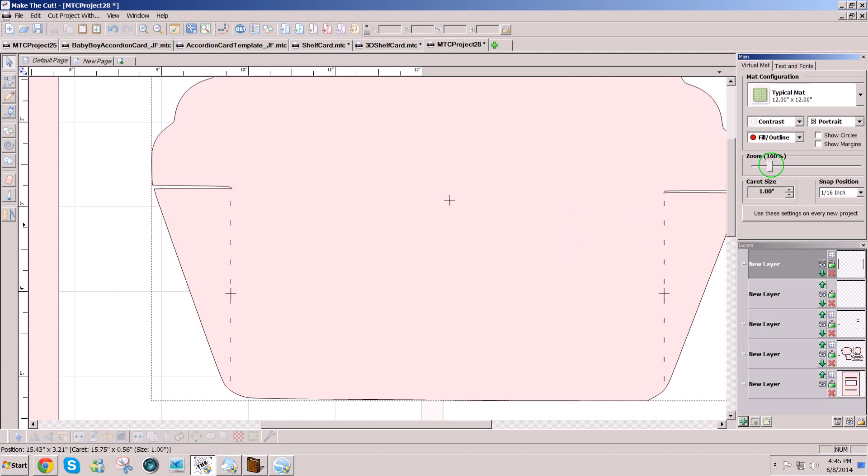So there we go. We have the same project. It just took a whole lot longer using the JPEG files, but that's just another lesson. And if you only have a JPEG design, then now you know how to get it into the software to work with it. And with that, I will see you later.